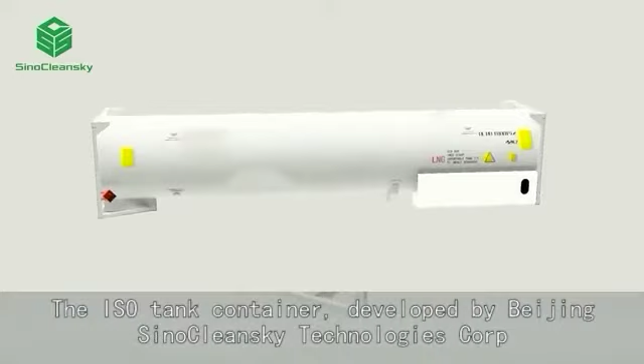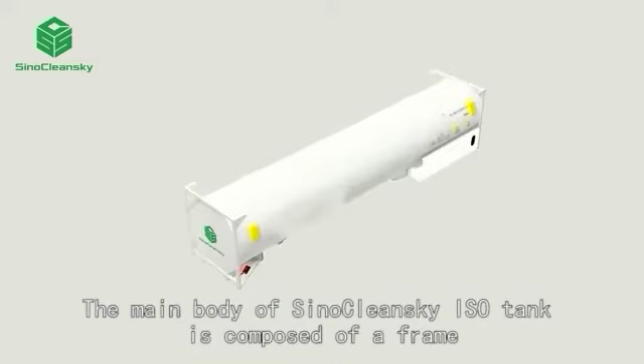The ISO tank container, developed by Beijing SinoCleansky Technologies Corporation, is a 40-foot LNG tank container which meets both ASME and GB standard, and is ideal for railway, highway, waterway intermodal transportation. The main body of SinoCleansky ISO tank is composed of a frame, a tank body and valve instrument boxes.

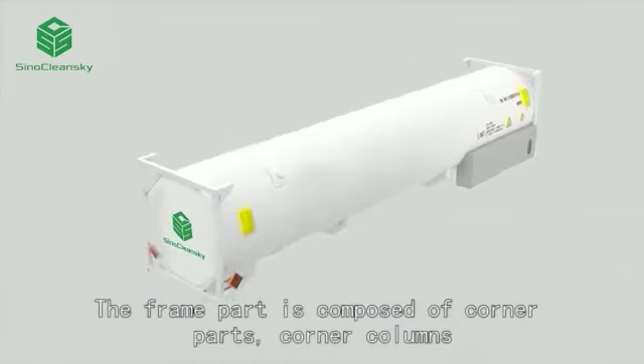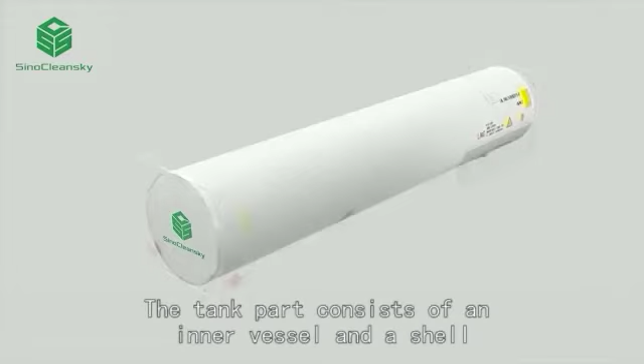The frame part is composed of corner parts, corner columns, longitudinal beams, and end beams. The tank part consists of an inner vessel and a shell. 8 points radial support structure is used between inner vessel and outer shell. One end is a fixed support and the other end is a sliding support. The insulation structure of SinoCleansky ISO tank is high vacuum multilayer insulation.

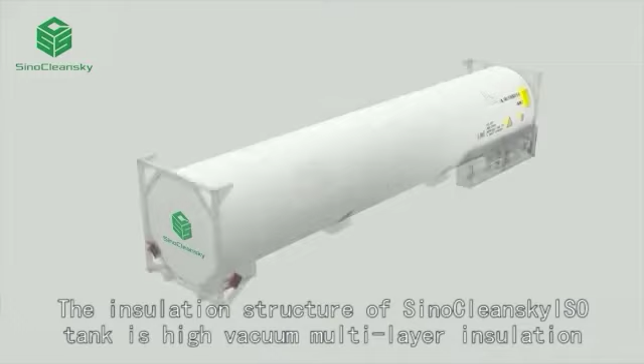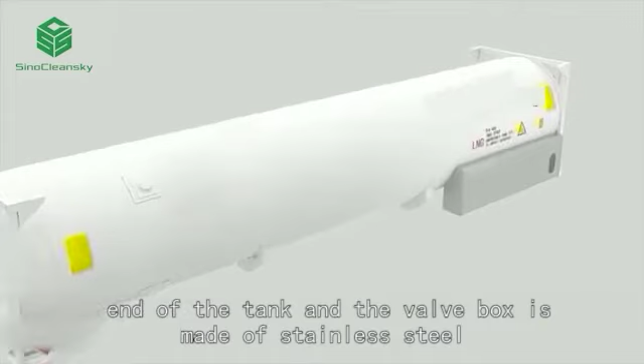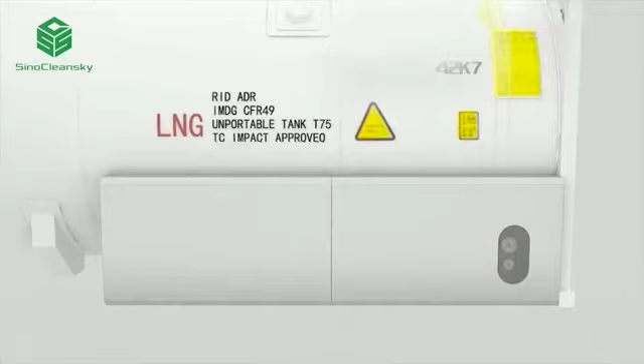The tank is provided with 2 valve boxes, among which the main valve box is arranged on the left side of the end of the tank, and the valve box is made of stainless steel. The valve box door is equipped with a visible transparent window in the position displayed by the liquid level gauge and pressure gauge. The door is open upward and equipped with a compressed air spring strut.

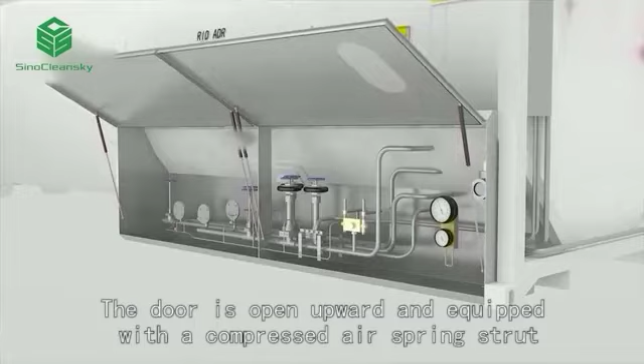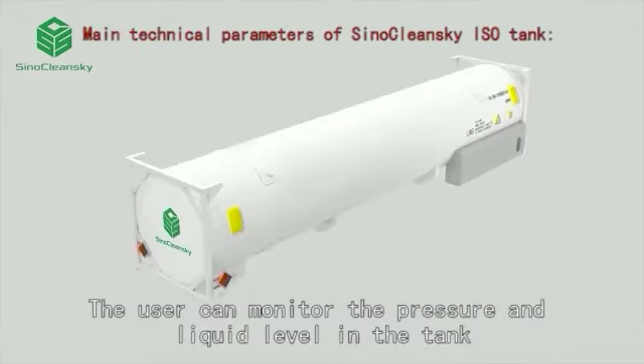The auxiliary valve box is arranged at the right end of the tank body. The valve box is equipped with safety monitoring device. The user can monitor the pressure and liquid level in the tank in real time through the mobile phone app.

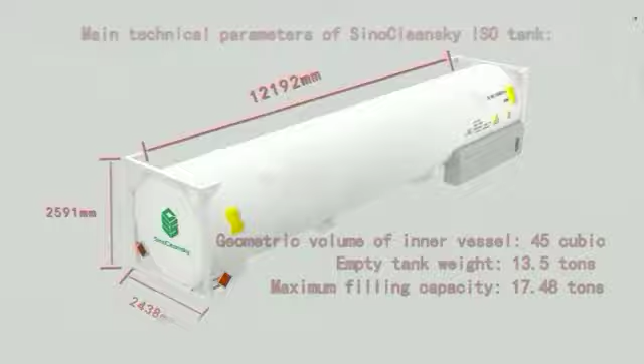Main technical parameters of SinoCleansky ISO tank. Outline dimensions: length 12,192 mm, width 2,438 mm, height 2,591 mm, geometric volume of inner vessel 45 cubic meters. Empty tank weight 13.5 tons, maximum filling capacity 17.48 tons, design life 20 years. ISO code 42K7. IMDG ISO tank T75.

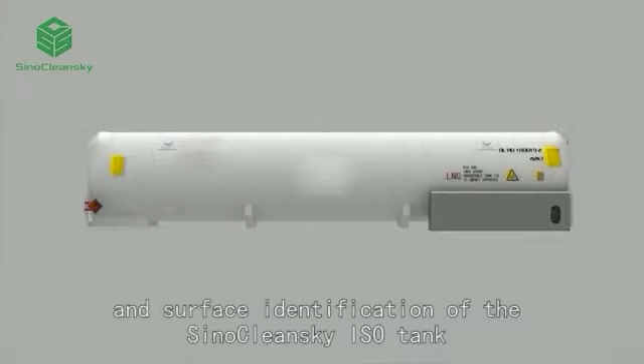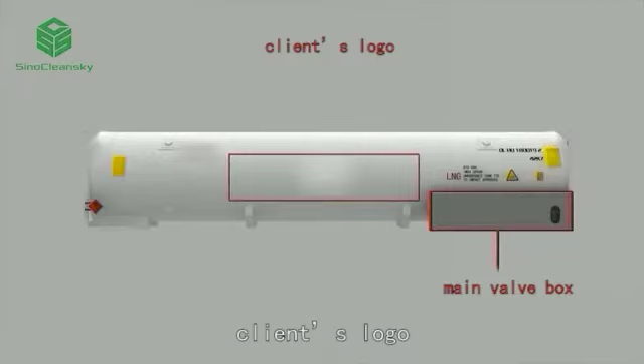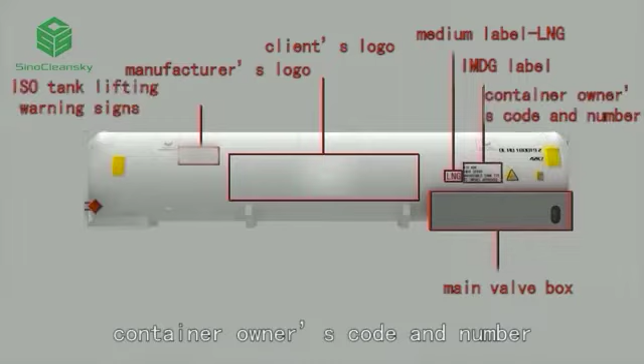Here we will give a brief introduction to the external structure layout and surface identification of the SinoCleansky ISO tank. The front side with main valve box is mainly composed of main valve box, client's logo, manufacturer's logo, medium label LNG, IMDG label, container owner's code and number, ISO tank lifting warning signs, forbidden shovel mark, dangerous goods mark, fire extinguisher.

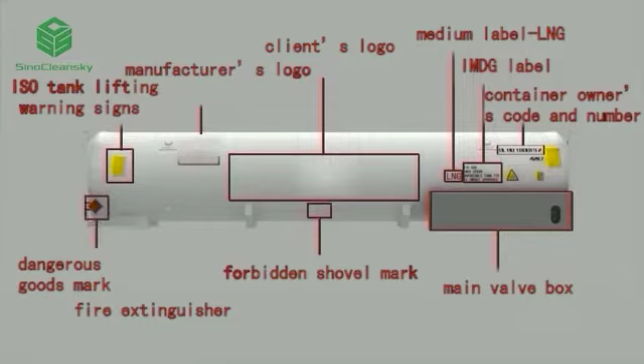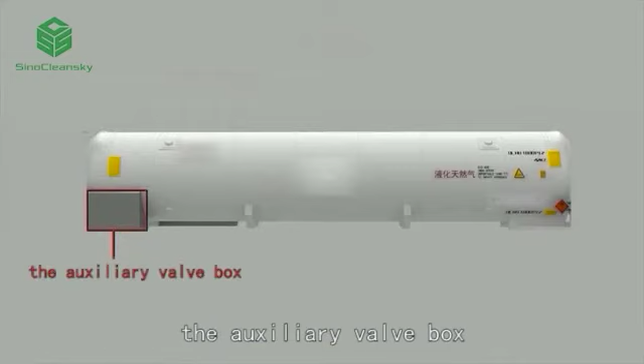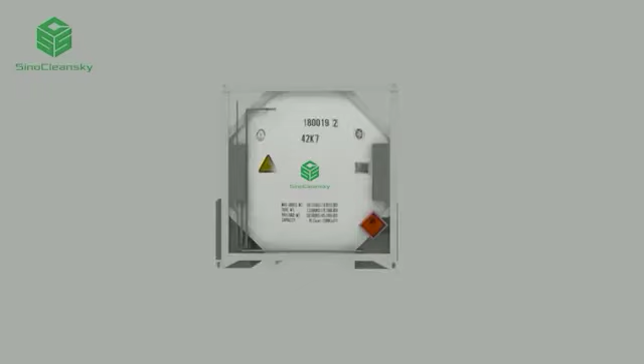The back side mainly consists of the auxiliary valve box, medium label, liquefied natural gas, the name of the designer. The front end mainly consists of container owner's code and number, documents cartridge. The back end mainly consists of main technical parameters, Nameplate 1.

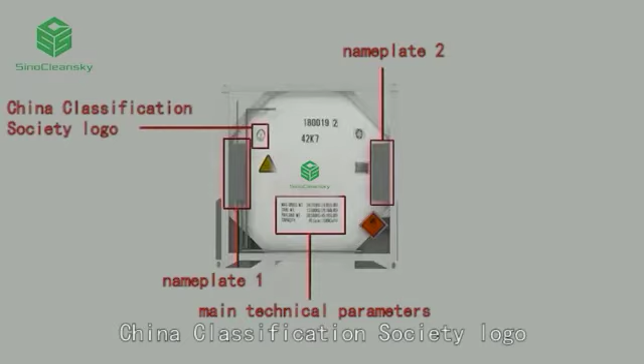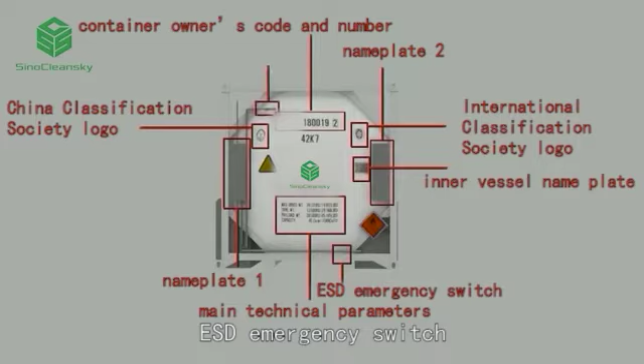Nameplate 2. China Classification Society logo. International Classification Society logo. Container owner's code and number. Inner vessel nameplate. ESD emergency switch. Vent port. Remote antenna. Electrostatic grounding position.

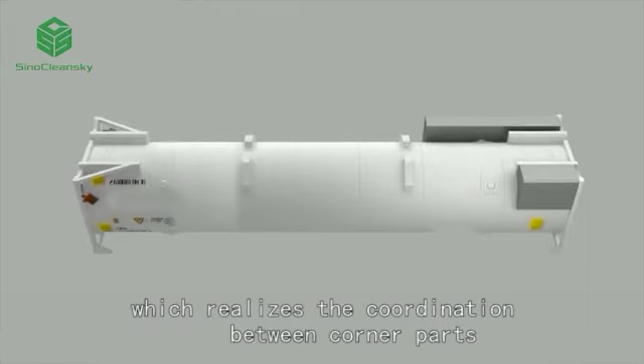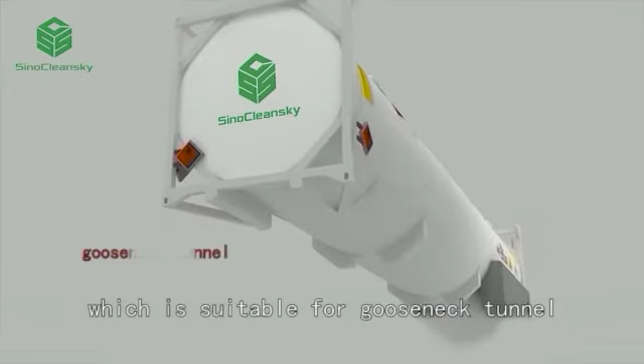The upper and lower sides of the tank are the basic supporting surface for lifting, which realizes the coordination between corner parts and rotary lock of the tank body and the stable and reliable stacking between the tanks. The bottom of the tank body is with gooseneck tunnel, which is suitable for gooseneck tunnel and skeleton flatbed truck loading and transportation. The valve instrument box is arranged on the side of the tank body. The box contains all kinds of valves, instruments, and safety accessories needed for tank operation.

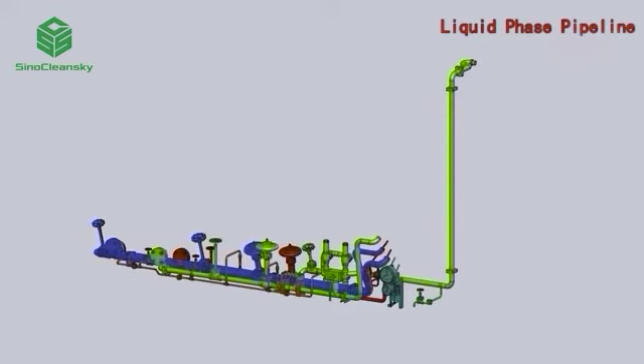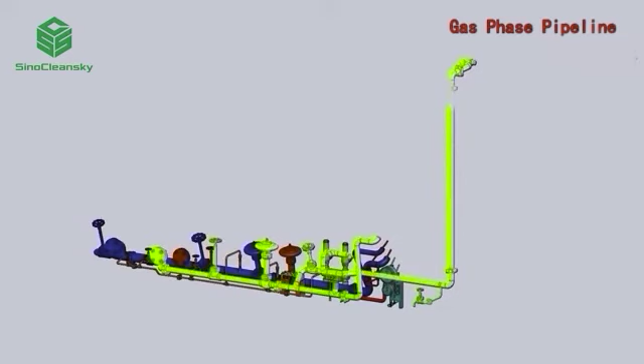Main internal structures are liquid phase pipeline, liquid interface E1, top filling valve V2, bottom filling valve V1, liquid phase emergency cutoff valve EV1, gas phase pipeline, gas interface E2, gas valve V4, gas emergency cutoff valve EV2.

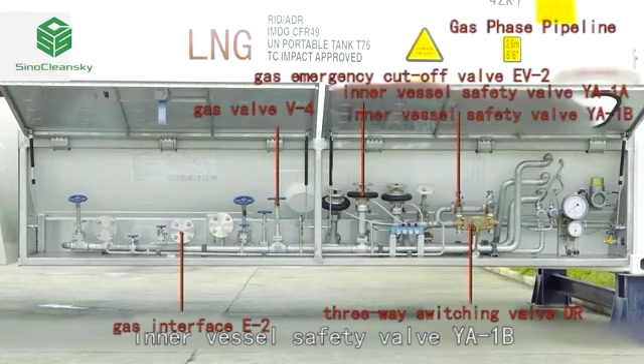Three-way switching valve DR. Inner vessel safety valve YA-1A. Inner vessel safety valve YA-1B. Pressurized pipeline. PBU interface E3. PBU inlet valve V3, PBU emergency shutoff valve EV3. Overflow pipe. 90% full test valve TV1. 81.6% full test valve TV2.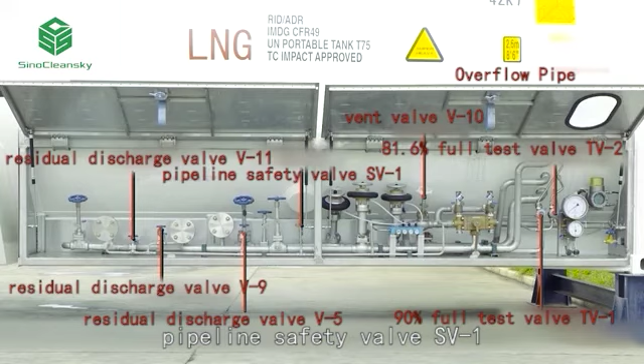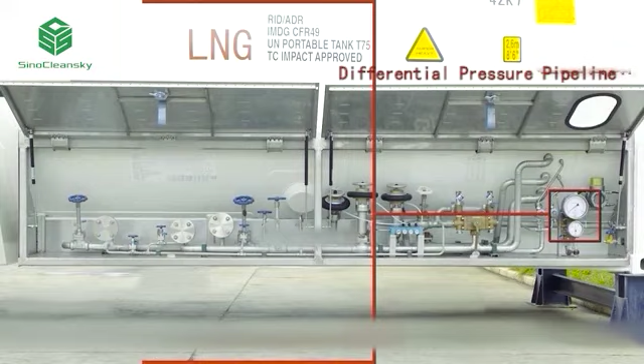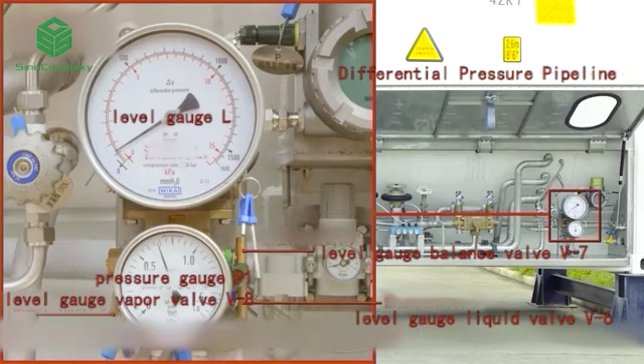Vent valve V10. Residual discharge valve V5. Residual discharge valve V9. Residual discharge valve V11. Pipeline safety valve SV1. Pipeline safety valve SV2. Differential pressure pipeline. Level gauge vapor valve V8. Level gauge liquid valve V6. Level gauge balance valve V7. Level gauge L. Pressure gauge P1. Remote monitoring device P.

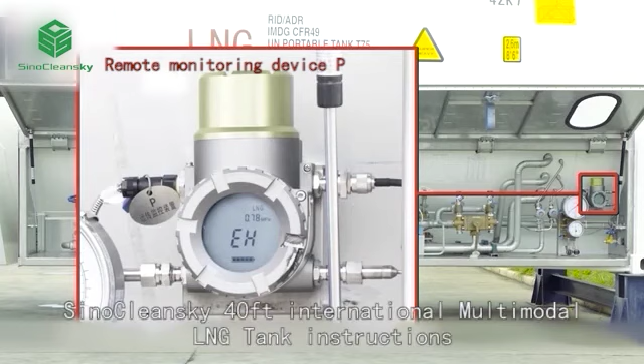Please read the SinoCleansky 40 feet International Multimodal LNG tank instructions carefully and refer to the flow chart to be familiar with the pipe nozzle valves and their functions, which is very important for operators.